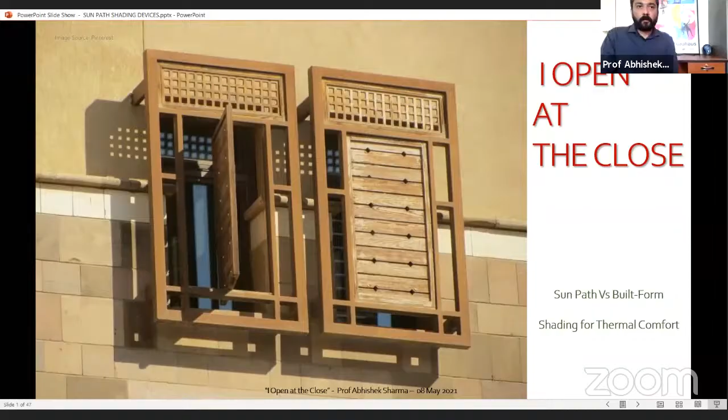Sun, I think I don't have to tell you that the sun is the epicenter of our solar system, the planet Earth, its rotation, its revolution, our life, our energy. You cannot imagine life without the sun.

And yet we prefer it to stay away, especially in tropical climate, especially in hot climatic zones. We want shade, we want refuge from the sun. And therefore, since we started constructing, especially in tropical zones and in the Indian subcontinent, intuitive wisdom guided us to tame the sun away from our built environment, to create shade, to bring shade, to ensure shade in our indoor built environment.

But what happens is, and this is not to offend anyone, but as chaotic as the screen seems now, this is what is going on. Especially in the last 10-15 years, I see a lot of thrust towards relying on computer software, and relying very less on the understanding of what the theory itself is.

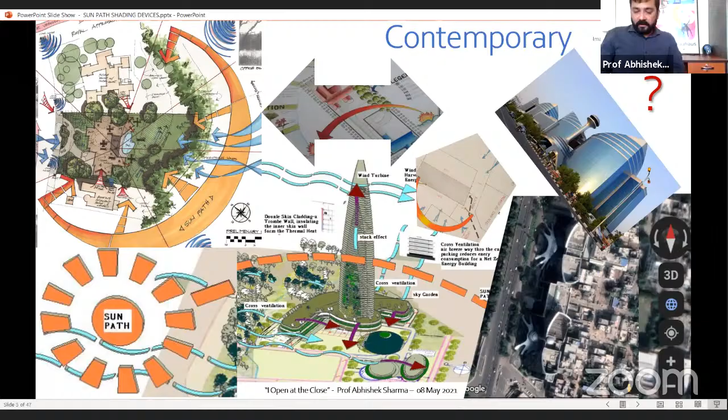But the situation is not so bad. When you do look through Google Images, you do see that there are certain corners on planet Earth where you see the kind of work which reflects that calculation has happened. That reflects that the understanding of selection of materials, orientation, the very understanding of what needs to be shaded is happening. And that is comforting.

That is definitely comforting. Now, in this chaos where everybody, including me, can be saying things, and especially for future generation, the students who are enrolled in architecture right now, it's important to know what is the right way. There is not a single right way, but there has to be some direction so that they can arrive at the solutions which are right.

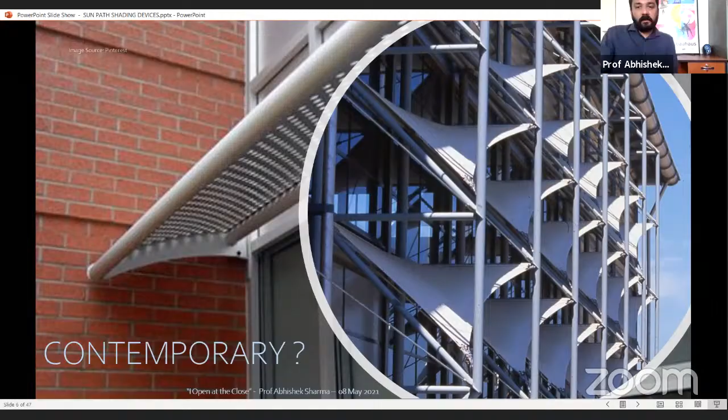Another quick recourse that we keep hearing about most of the time is that let's just go back into the past. Let's go vernacular. Let's look into the traditional. And we are trying to research on it, and we are trying to find out some formulas. And yet the debate remains whether it was intuitive through people, was it just the intuitive blend with the craftsman skill, or was there some hidden shastra?

But definitely, one thing is there in all these vernacular examples: we see that the human being had the wisdom to shade the built environment, to keep their indoors cooler during the day. And I think it's not difficult to understand that, because the entire solar system has sun as the epicenter. Throughout our life cycle, we can easily connect with the periodical path of sun, the annual path of the sun, the daily path of the sun.

So its implementation while creating built environment does not have to be only a gambit of research scholars or science or technically savvy people. And I want to remind today there was something in between. Of course, there's one extreme path that you can go back to traditions, ancient past, or you can do the blunders that we are doing today, because there's a lot of chaos and confusion.

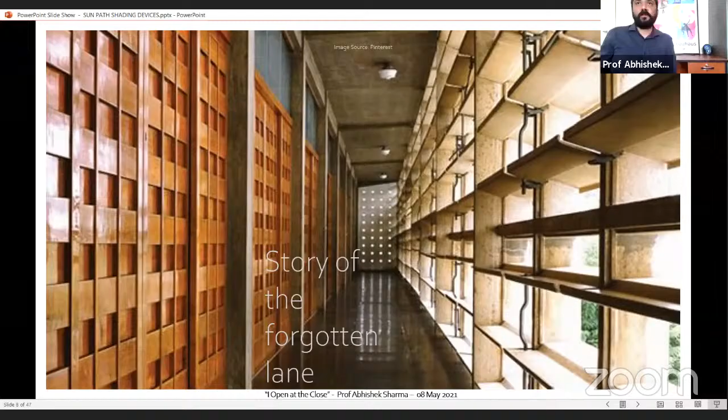But then there was a timeline, a period in the history of development of built environment, especially in mid 20th century, which I think we are forgetting. We are forgetting that a lot of work was done, was experimented - the story of the forgotten. And especially I'm saying this because I firmly believe when practice was manifested in theory, or rather both were complementing each other.

I can say this because I was sort of lucky to be from a city which entirely got planned from scratch. And only by experiencing those buildings, using those buildings - my father actually was fortunate to have a government accommodation, which later I found was designed by Pierre Jeanneret.

So all these kind of experiences made me experience the buildings in my hometown. Of course, I moved to Delhi, Dubai, different cities in India, now Jaipur. And the thing that I want to share today is that there are certain buildings which definitely are climate responsive, meaning the designers have definitely thought about solar path, sun direction in mind. And then there are many, many buildings which are turning a blind eye to the whole thing.

Now, one such example, I'm sure many of you know about it: the first concrete building of India, Golconde Ashram in Pondicherry. It's from the Aurobindo ashram, the international guest house. This building was designed in 1938, and it took about 4 years to construct. Its architect, George Nakashima, was a graduate from MIT.

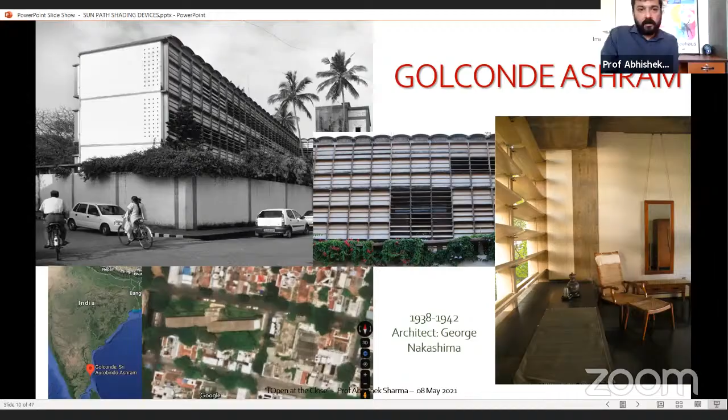Then you get tempted to go to, well, my stay in Jaipur is quite recent. When you look at the walls and the kind of development that happened way back in 1726 and 1730 with Vidyadhar Bhattacharya, look at the orientation of all of these, this was the conglomerate here where my arrow is moving. It's for the local people, for the merchants and the workers. And this is the palatial development in the center, in the central block of Pink City, Jaipur.

Look at the proportions, the courtyards are larger in size. I'm sure the designer wanted to give the very best to the patron king, and the large volume of the courtyard allows for more air, offering more convective cooling, and of course orientation for shade.

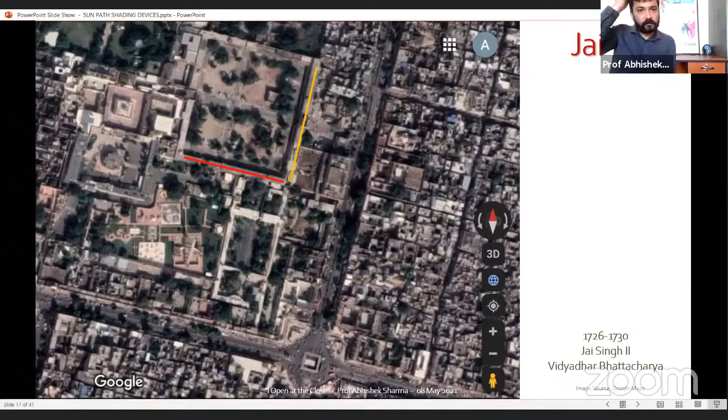Very close to where I live, in Shimla, again from 1822 to 1888, it developed more organically, unlike what we think - that it was a planned development. It was discovered, the territory was exchanged, but from the entire territory, they picked the site which permits the longer sides of the building blocks facing north and south, and especially the initial development was facing south.

Another important thing to keep in mind is that we have been in Pondicherry during this presentation, then to Jaipur, and now Shimla - three different climatic zones. But the thumb rule is that in the tropics, cardinal orientation places the longer block in such a way that you have a longer face facing north and south, and shorter face east and west. There's a consistency over, I would say, 200 years and in different locations.

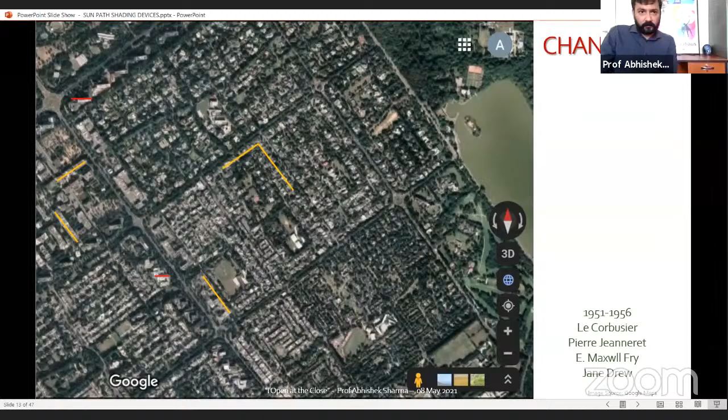The images are sourced from a book documenting Chandigarh by Professor Kiran Joshi, a renowned professor from Chandigarh College of Architecture. This is an image of a typical neighborhood block, the government housing, which is still intact in some ways. How is this not in line with the design decisions made for Hawa Mahal and City Palace? Look at the orientation, the courtyard, the perforations, the blocks, and the continuity of a system throughout the city, which allows the wind, the sun, and shading devices to work together for a comfortable living environment. The scale of courtyards here can definitely compare with the palatial courtyards in the walled city of Jaipur, the middle block of Jaipur.

So again, my point is the wisdom remains the same since the last 250 years. Something has gone wrong.

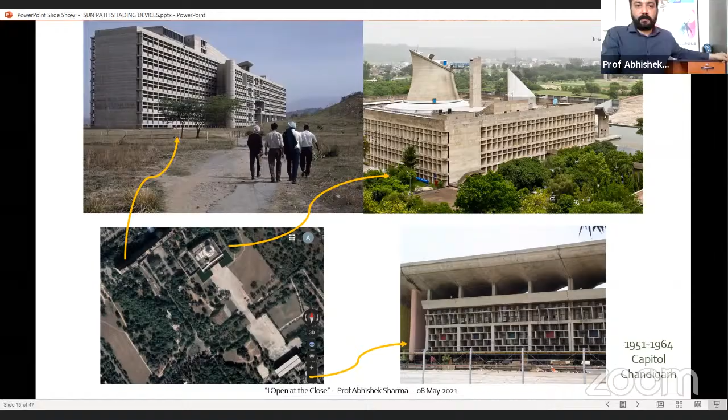Similar systems were adopted for the Assembly and the High Court, and the High Court also draws on the same wisdom found in the Golconde Ashram—that you need a double roof to allow convection cooling for the roof, along with shading systems. If you look at it, these three buildings, though not very far from each other, show that the design of the shading device is not limited. The underlying principle, the underlying theory, is perhaps the same, but the expression of form and design in the shading device is very different. So the idea here is that the same formulas do not necessarily mean you'll have the same monotonous, boring design—look at the multiple expressions of shading devices that have taken place.

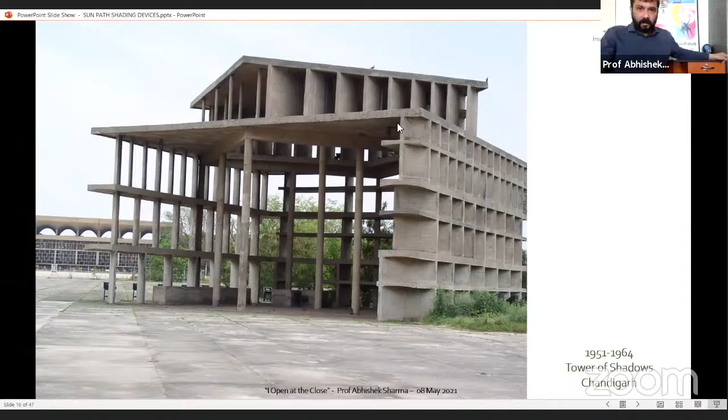Now, of course, everybody knows about this Tower of Shadows. It's a physical manifestation of theory—this is where the theory gets built. The understanding of solar azimuth, altitude, and wall azimuth put together allows you to devise a system of shading, horizontal and vertical, for both cardinal orientation and diagonal orientation.

I'll quickly run through a few examples because it's important to show good sustainable architecture—sustainable not in terms of rating, since rating systems weren't available at that point, but architecture where the aspiration of becoming modern was met by using resources mindfully, by not throwing away the wisdom from tradition that tells you to orient your building correctly and shade the facades and openings facing the sun.

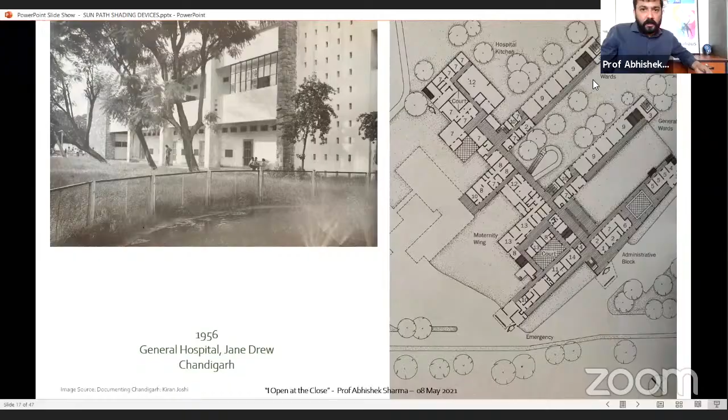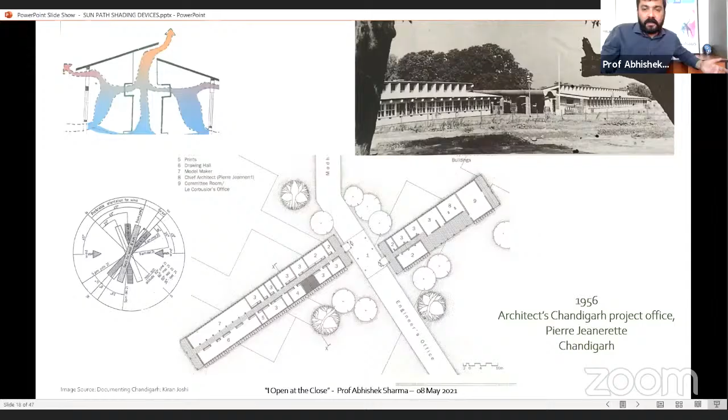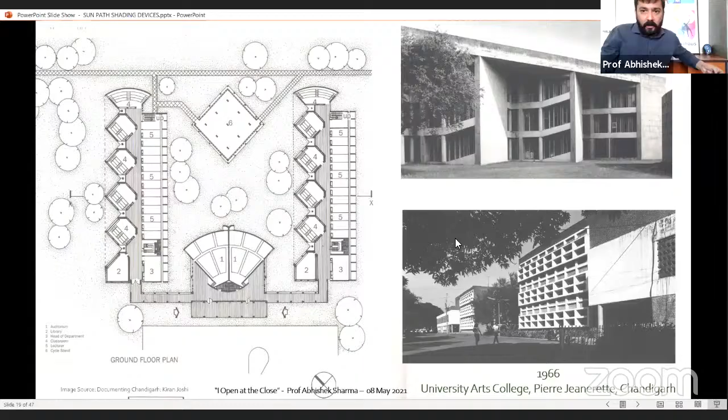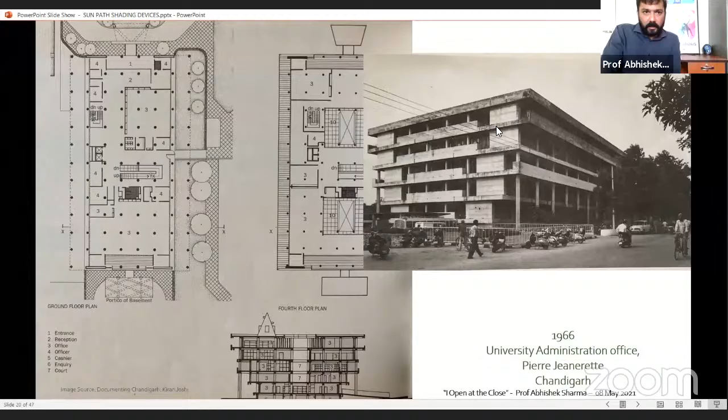No area, no functional building was left out. Every building was given the same treatment, the same benefit from the theory of climatology. No building was spared—they never thought, 'oh, we are in a hurry, we don't have time, this is a smaller project, why should we worry about this?'

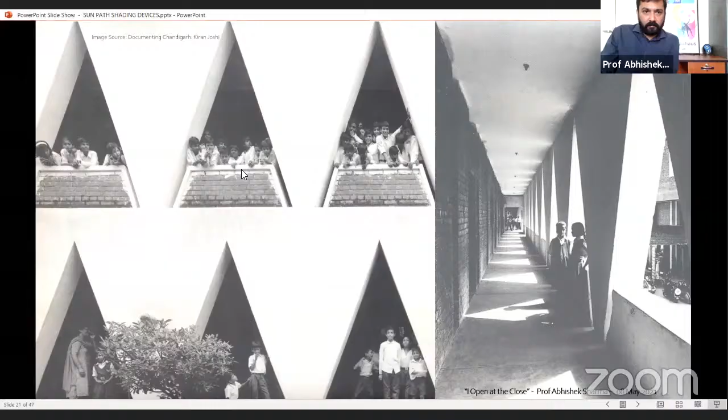Even a basic primary junior school had a corridor that was a means of circulation but also a shading device. Many schools followed this—look at the orientation, drawing light into classrooms from the north, using corridors on the south. The corridors act as shading devices, with minimum surface exposed to east and west. These photographs show the same principle in different configurations and functionality.

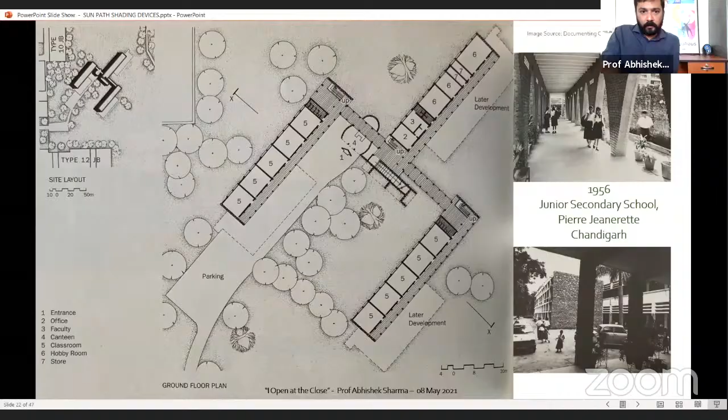And in housing—one such house is where I lived. Another experiment was the use of sunbreakers to shade the surface itself, especially surfaces facing south and southwest.

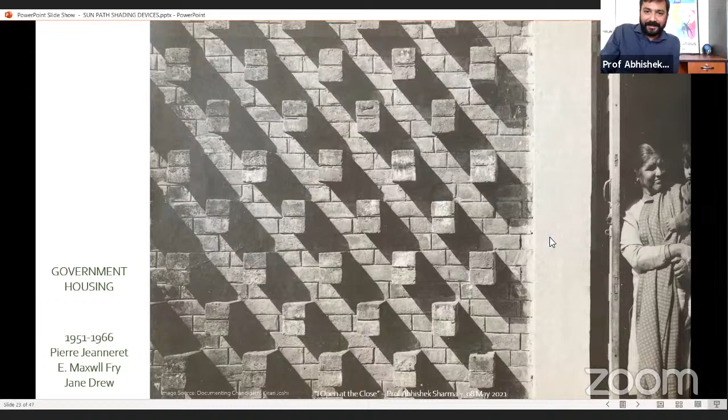Not even the peon's house was spared from the application of climatological theory. Again, the orientation mattered—north-south orientation, open spaces, shading devices. The entire city, especially the government housing, is a good example of a variety of shading devices.

Perforated screens—I'm using this word again and again because this is what the revised manuals of rating systems talk about today, and what those selling us aluminum shading devices talk about today. My idea is to give you a connection that this wisdom was very much there already. Something happened—I don't know what—such that we haven't seen much application of it in the recent last two decades.

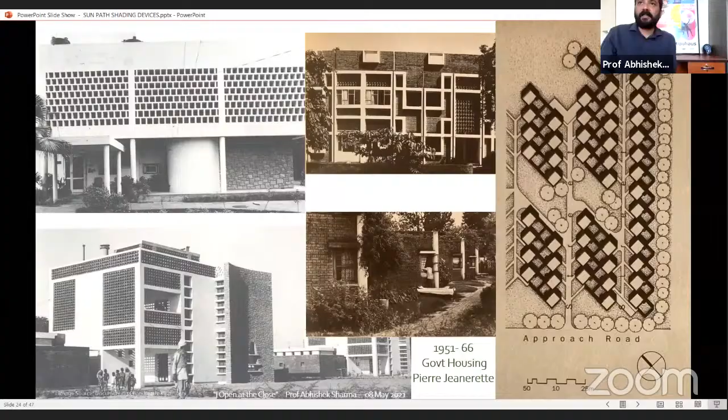This is a 1956 building, again in Chandigarh. I'm sharing a lot about it because the entire city had so many examples of this climate-responsive architecture, and it's also meant to open up the minds of the younger generation to the fact that a lot of experimentation happened here in your own country.

This is the Govt Press building, designed by Maxwell Fry. Again, look at the orientation—northeast, southwest. The northeast facade has openable glass glazing; this may be called the first glass building of India. The southwest facade has openable louvers, something similar to what we saw in the Golconde Ashram just ten years earlier.

So this whole idea of movable, openable fins on the south and southwest facade is very old. These were aluminum fins, unlike at Golconde Ashram, where it was a concrete or ferrocement panel that used to move.

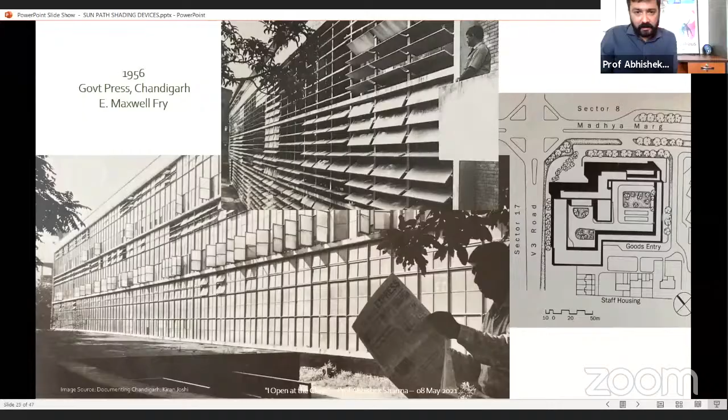Now, with that, my question is, and I may be overshooting the time a bit, Praveenji, but the thing is, where have we lost this theory or this understanding? Because when I look at Chandigarh...

I think it became muted in between. So the lost theory, as I call it, is because just 9 kilometers from Chandigarh, we see a development from the 1970s, and more so this one, especially in 2000 and 2020, shows a complete loss of this understanding of orientation right at the edge of the city. I will not name the localities now, but you can see this on Google Maps, and this is evidence that something is missing. We are losing this theory, the very understanding of orientation.

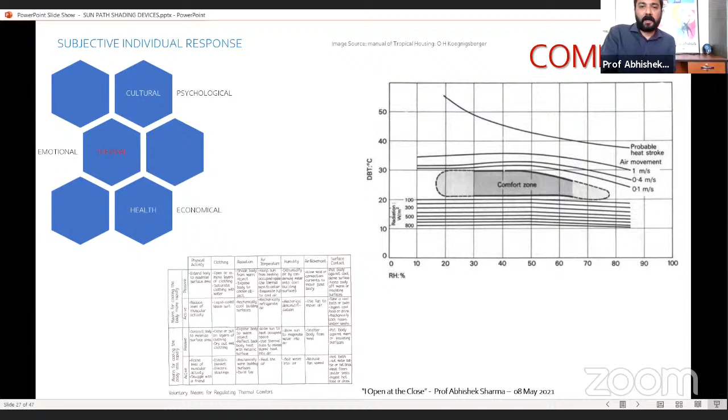There are responses for how we deal individually with fluctuations in climate. Our comfort zone, within this range, can be subjective to personal responses, and that is permitted, that is allowed. Some people wear more layers of woolens, some people set the air conditioner temperature very low, and so on. So yes, there is an agreeable comfort zone between 20 and 30 degrees which, in my opinion, does not require any mechanical energy-consuming device.

Another understanding an architect must have is material behavior and heat flow through them. Heat flows through radiation, conduction, and convection - basic physics from school. Radiation: a hot surface emits heat waves. Conduction: when two objects are together, the surface contact allows heat to flow from the hotter body to the colder body. And air, when it passes over a hot body, can carry heat and pass it on to the surroundings and to other nearby objects.

In the process, it is cooling the object which was hot, but depositing heat at some other point. I'm sure these diagrams are from a very basic but most important book called Manual of Tropical Housing by Koenigsberger - a wonderful book which explains how a building exchanges heat. It receives radiation, it can receive or lose heat through convection, and it can allow for evaporative cooling through the roof from any moisture available there.

Occupants add to the heat, and any electronic or mechanical equipment inside will add to the heat. In this equation, when we sum total all the heat gains and heat losses, if the equation is zero, we say the entire exchange is in equilibrium. A positive value would mean the building is gaining heat, and negative means the building is losing heat. So a negative value will definitely be experienced in cold climates, while a positive value is typical in tropical zones, especially in countries like India.

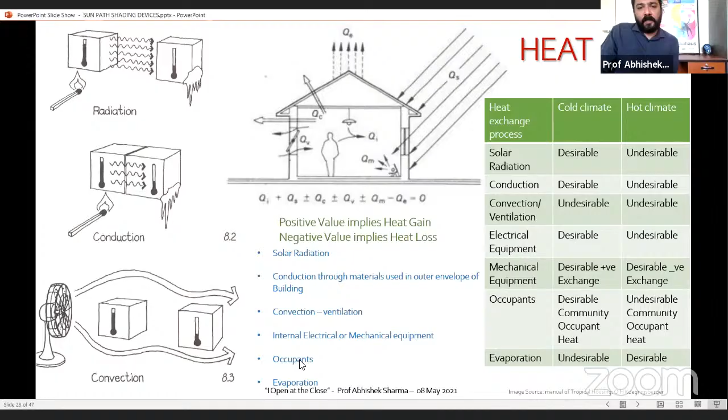It's not in the scope of this webinar to introduce all the theories, but I'm assuming you all know we have three basic equations for convection, radiation, and conduction. I've colored them separately because if you practice with these equations—I can share this PPT with everyone later—you'll find out that the maximum heat gain is through radiation falling directly through the glazed window inside. The second major factor allowing heat gain is conduction, and convection is very subjective.

It depends on whether you have openable windows, whether you're using outdoor air to cool, and so on. So the most important factor which determines the heat loss or heat gain, depending on the climatic zone, is radiation. With the area, the radiation intensity, and the material properties of glass, one can calculate it. Calculations can also be done through software—I'm not against them—but understanding that radiation is the major culprit, save your building, protect it.

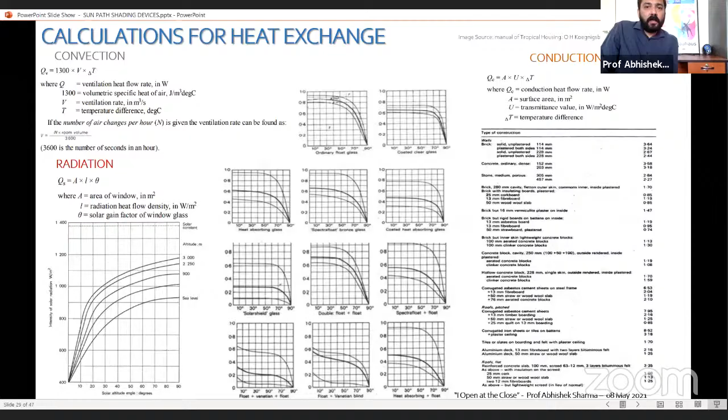The strategies, in simple terms: avoid solar radiation, use materials with low U value so they don't allow conduction to happen, and minimize hot wind exposure—avoid direct opening of windows to the external environment if it's hot. But if the outside temperature is cooler, especially at night, you should allow windows to open. Openable windows are always better than closed ones, and you should allow convection to cool your building during the night time. As I said, the first factor—radiation—is the major culprit.

There are only two thumb rules, and they're not difficult to remember. Orient your buildings, especially in tropics, so that you have minimum windows in the east, south, and west directions, and maximize the windows in the north direction. Then you have to devise shading devices using the sun path.

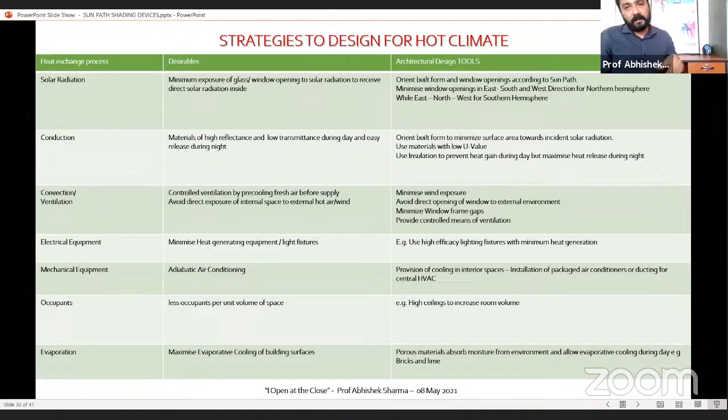Now, the sun does not always rise exactly in the east or set exactly in the west. It's dynamic, and that's the beauty of life on Earth—the seasons, the annual cycles, depending on the rotation and revolution of Earth. The major factor is the tilt of the axis of rotation relative to the plane of revolution, by an angle of 23.5 degrees.

As the Earth completes its circle, the extent where we get perpendicular radiation keeps shifting—from the Tropic of Cancer in the north during June to the Tropic of Capricorn in December. This is what happens to buildings: in summer they have shorter shadows, in spring and fall they enjoy roughly equal days, and in winter you have long shadows and inclined radiation. The same building, the same built environment, is exposed to differential settings—this is the very way the entire solar system, Earth's revolution, and rotation works.

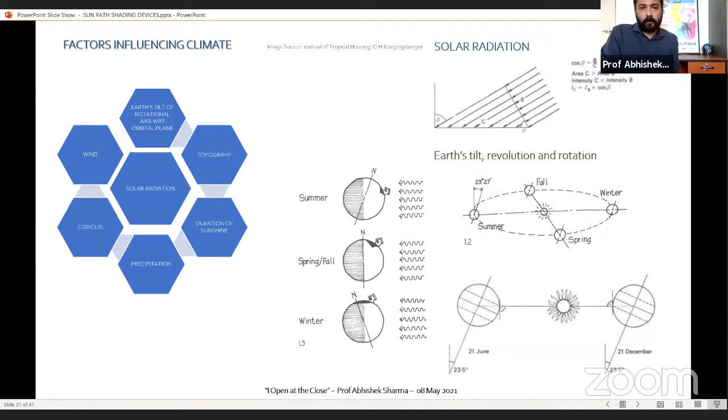The wisdom has to crystallize to the very basic reflex action of a human being, and I'm sure you all can hold an umbrella and point it towards the sun throughout the day and every day throughout the year. So if formulas scare you, if formulas and the terms scare you, I think you need to train your mind to understand that it is not so difficult as it seems. It is as simple as knowing where the sun is and holding the shading device against it.

Technically, what the experts have done is make some assumptions. We assume that Earth is flat. We assume that the sky above a point on this Earth is like a hemispherical dome. The observations of the sun's position are marked on a daily basis, and each day, the movement of the sun can be traced on this imaginary sky dome, and that path is called the sun path.

Now, why I'm saying this is that it is definitely different than the kind of diagrams we saw in the beginning, and that we usually see. So this is definitely an assumption that there is a sky dome represented by a hemisphere, and the sun's movement is traced, and this trace line is the sun path. You can have it for each day.

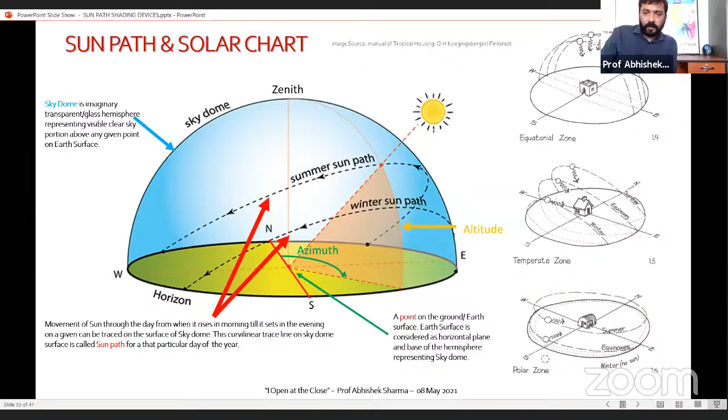There's no need to name one, there are so many. And how is this represented in a two-dimensional diagram? It's a stereographic representation. You use the same system of horizontal and vertical curvilinear lines on the hemisphere to mark the position of the points.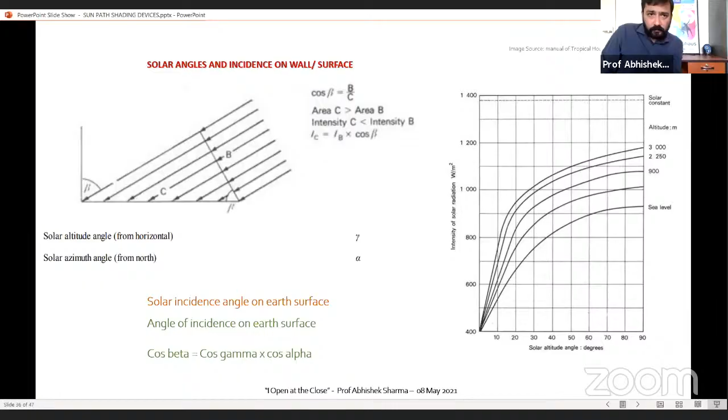If we want to find the intensity on the wall, we need to find the angle between the wall surface, the perpendicular to the wall surface, and the solar incidence angle. So what is a wall azimuth? Just like solar azimuth, wall azimuth is basically guiding us, telling us the direction of the wall surface with respect to geographical north. So the perpendicular to the wall surface, which we want to calculate the shading device, we need to find out the angle between north and that perpendicular.

So some pre-calculated answers would be like: wall azimuth for north-facing wall would be 0. For east, it will be 90. For south, it will be 180. For west, it will be 270. And for the diagonal positions, like for northeast, it will be 45 degrees. For southeast, it will be 135. For northwest, it will be 315. While for southwest, it will be 225 degrees.

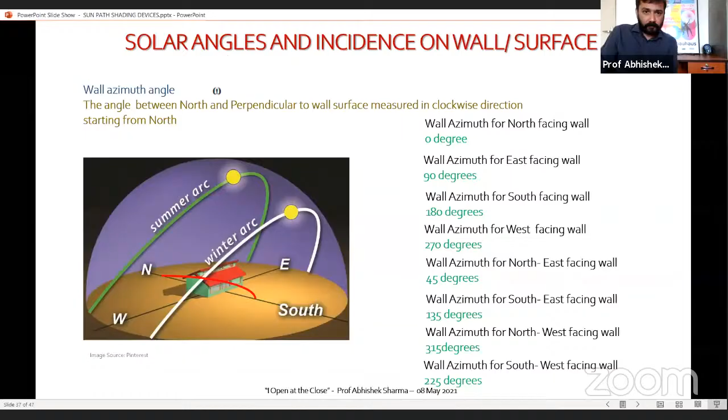So getting to know a wall azimuth is not a very difficult thing. Wall azimuth, again, is the horizontal direction of the perpendicular with respect to north. And we need to know this because we want to know what is the angle sun is making to the wall. Previously, we found out what is the angle sun is making to the point on the surface of the earth. Both are different, both are required, but this is more important to know the angle between the solar incidence and the wall surface. And how do you get that?

You again get by changing the equation. The altitude angle remains same, but the difference between wall azimuth and solar azimuth gives us cos delta, and the product of it gives us the incidence angle on wall surface. It may sound complicated, but if you understand it subjectively, it is not that difficult. And once you know this three-dimensional angle of solar incidence, you can resolve it again backwards to find out HSA and VSA, which is the horizontal shadow angle and vertical shadow angle.

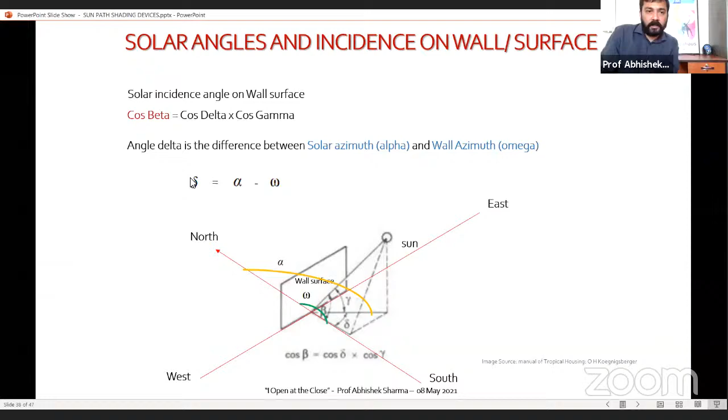The horizontal shadow angle is the difference between the wall azimuth and solar azimuth, which you already calculated. The vertical would be the component of this vertical angle on a plane perpendicular to the wall. You can use trigonometry, the formulas are available. That angle, the vertical shadow angle, is epsilon, and you get it by multiplying tan of your solar altitude angle with secant of your azimuth difference, and that gives you this vertical shadow angle.

The vertical shadow angle helps you design how much depth is needed. If you know epsilon, 90 minus epsilon is what you need to draw in your section to find out the depth of the horizontal shade. Like in this photograph, this huge cantilevered pergola is acting as a shading device for this wall, and it has a cutoff angle which can be calculated using these formulas. Similarly, the altitude and azimuth difference gives us the horizontal shadow angle, and 90 minus this delta will help us design the width. The same must have been applied in the photograph you see.

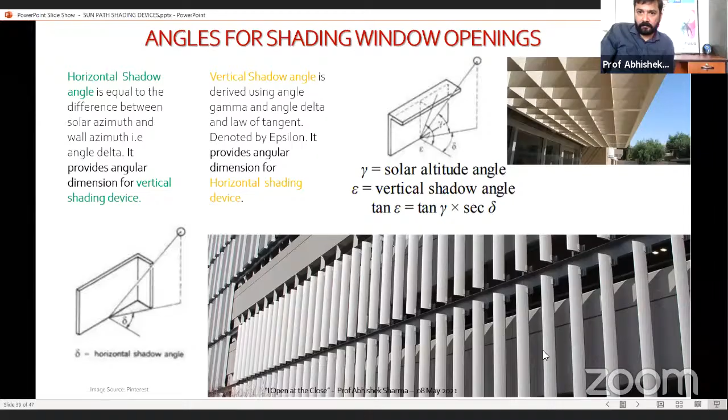Now these widths look absurd, but they are the requisite widths. For example, this huge depth is required if you want to shade the surface with a single horizontal surface. Similarly, this width of the vertical would be required if you want the entire surface to get shaded. But then there is a smarter way.

You can break the surface at smaller intervals. You can have what we call fins, or shading fins in a way. You maintain the same angle, you maintain the spacing in such a way that the angles we calculated remain maintained. You can have combinations of vertical alone, horizontal alone, or a brise-soleil where you combine all together. But no matter what you design, the delta, the theory behind delta, epsilon, and the azimuth difference does not change.

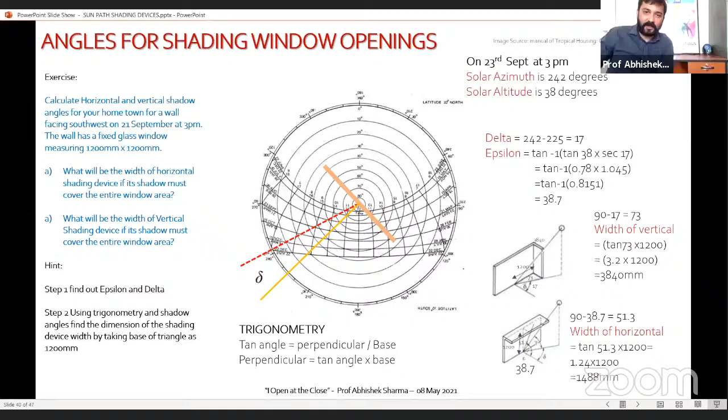It does not change in 1727. It does not change in 1822. It does not change in the 1950s, and it does not change in 2020. So this age-old wisdom, age-old theory, you need to master.

And I would say, don't rely on software for understanding. Rely on your own understanding, because I see that because of relying on software, on ground reality, we are missing on the wisdom.

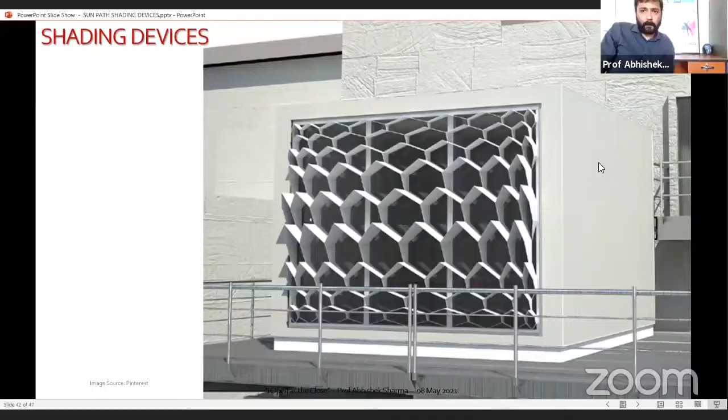Now, the thumb rules and wisdom I want to close this presentation on is that your static shading device is more sustainable because it does not require any energy, any electrical energy to move. Any moving component means it will require energy. Of course, if you can back it up with energy production, definitely you can use them.

Mechanically or electronically movable fins are best because you can keep changing the direction as per the direction of the sun, but they are energy intensive. Otherwise, static shading devices are quite good if you are good with your angles. And brise-soleil, which is the combination of vertical and horizontal, is definitely better.

But a few things you must keep in mind: the problem which happened in the 50s and 60s is that some of the materials selected for shading devices did not have a low U value. They had the same issue, like I showed you in the Secretariat, the shading device was separated from the main wall, but how many of the buildings which were later made could do that?

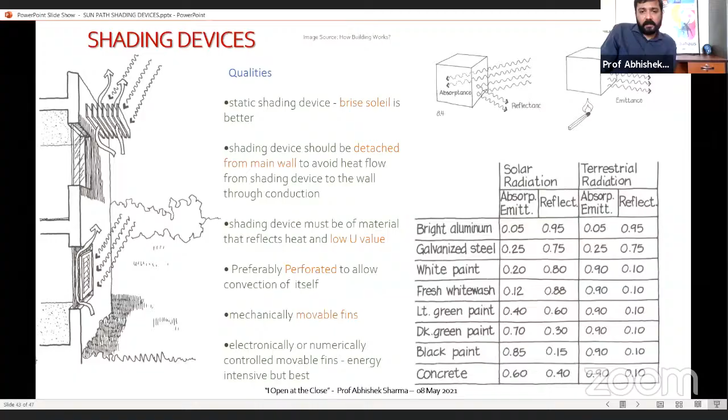Some of these can be called contemporary, but I see their roots in the past. The material with the lowest U value, perforated to allow this, is the latest trend. But one must also understand that glass was never used traditionally in India. We never used glass; it's only in the last few decades that it's being used as an imitation material.

Europe wants heat gain in their buildings, so they sell us these expensive systems. They push us to use glass and then use a perfect shading device made of aluminum, which is perforated. As per the theory, if you calculate the angle and make them movable, yes, but why use glass in the first place? That is something you must ask yourself. And if you're using glass, why don't you use it on the north face or the faces which do not receive solar radiation?

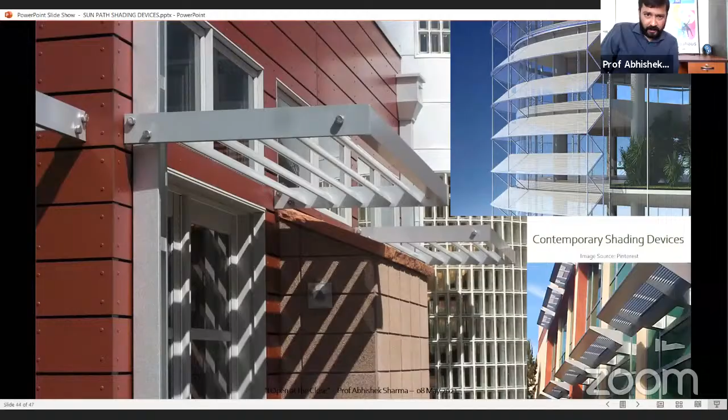Some pre-built shading devices in aluminum frames are being marketed now. Again, they are very good, but what I'm questioning is why we put our glass on the south face. Why do we have windows to the west and east? Where do we have such huge glazings? Why do we first expose ourselves to radiation?

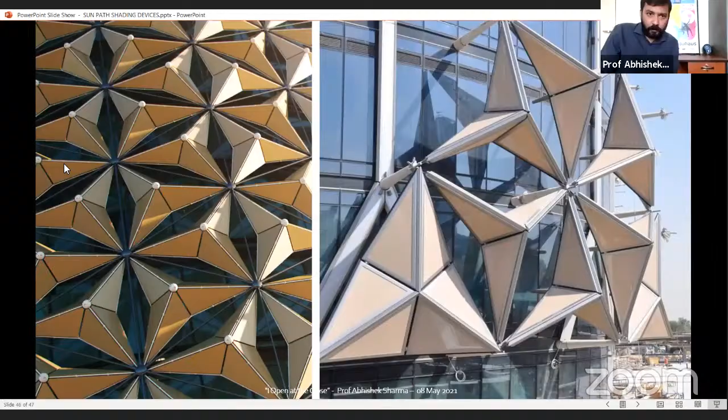Of course, the theory is implemented here; the only change is the structural system. The previous systems used a very basic column-beam structural system for self-standing shading devices. These shading devices become structurally more efficient, but again, they are on glass.

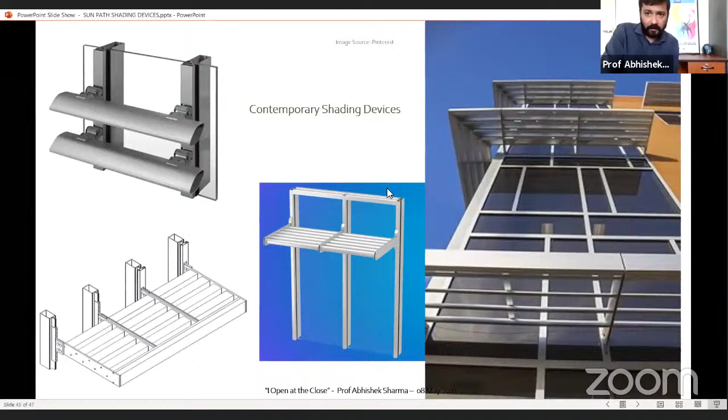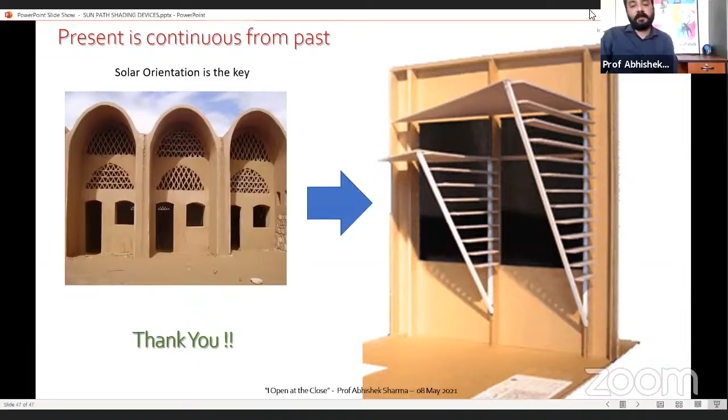So what I want to sum up in my presentation is that the present, the contemporary, is a continuity from the past. The wisdom which was there 200 years ago, 100 years ago, still continues. The expression can change. As a student you must master the thumb rule of what should be the orientation in tropics, and you must know the solar azimuth, wall azimuth, and altitude angle using the solar chart. If you can calculate that, you can have multiple expressions of shading devices and devise many structural systems for them, but the purpose is the same: thermal comfort, to keep the exposed surfaces protected and shaded from the sun. Thank you.

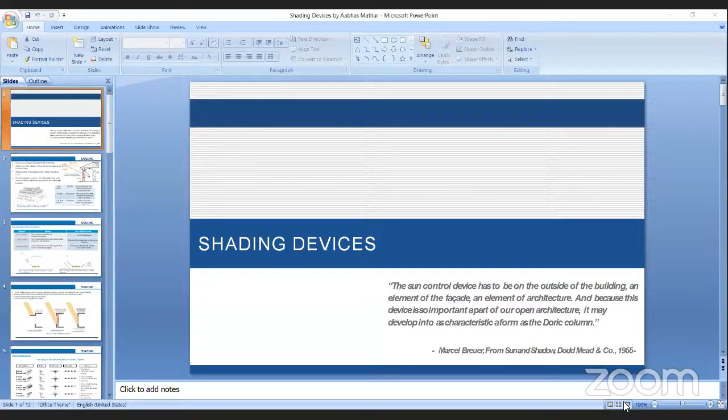Is it visible? Yeah, it's visible.

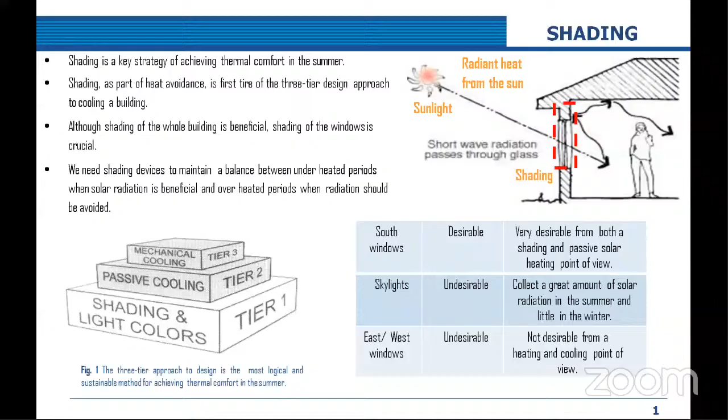We have three components of total solar radiation: first is direct radiation, second is diffuse radiation, and third is reflected radiation. Direct radiation is solar radiation transmitted directly through the atmosphere onto the building, and the effective control technique is exterior shading devices.

In diffuse radiation, solar radiation has been scattered by molecules or suspensoids in the atmosphere before reaching the building, so it needs additional indoor shading devices or shading within the glazing.

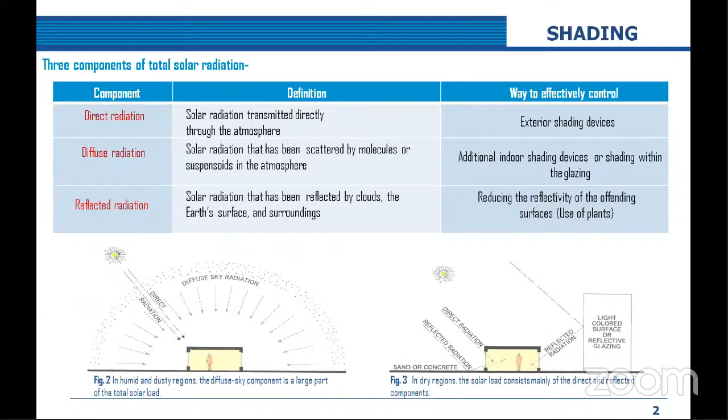Reflected radiation is solar radiation that has been reflected by clouds, the earth's surface, or the surroundings around our building or built environment. This can be reduced by lowering the reflectivity of the offending surfaces, such as using plants or softscapes near our building.

Exterior shading is greatly preferred over interior shading because it is important to stop solar radiation or heat from entering the building in the first place.

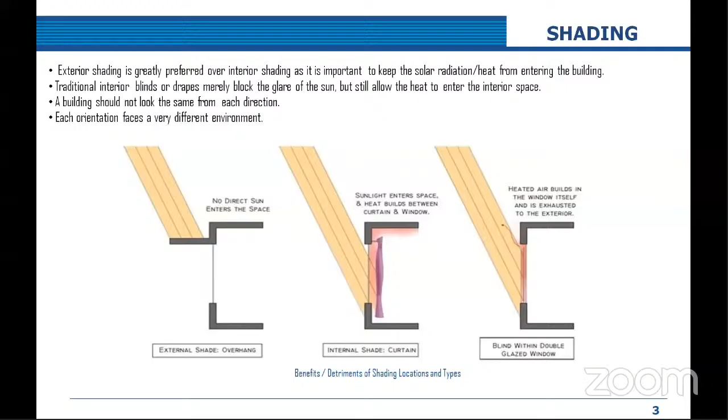In the first image, we see an overhang which helps ensure no direct sun enters the space. With internal shading, which has a curtain, sunlight enters the space and heat builds between the curtain and the window. In the third image, we see blinds within double glazed windows, where heated air builds in the window itself and is exhausted to the exterior.

Here are some examples of fixed shading devices: overhang horizontal panels, overhang horizontal louvers in the horizontal plane, overhang horizontal louvers in the vertical plane, and overhang vertical plane. We can see in section how these four types of fixed shading devices are placed in front of the window or opening of the building.

The conclusion we can derive is that the overhang horizontal panel traps hot air and can be loaded by snow or wind, meaning it can have a dead load during certain weather conditions. Overhang horizontal louvers have free air movement, with small snow or wind load, and are small in scale.

Overhang horizontal louvers in the vertical plane reduce the length of the overhang; the view is restricted, and it's also available with miniature louvers. The overhang vertical plane has free air movement and no snow load, but the problem is that the view is restricted.

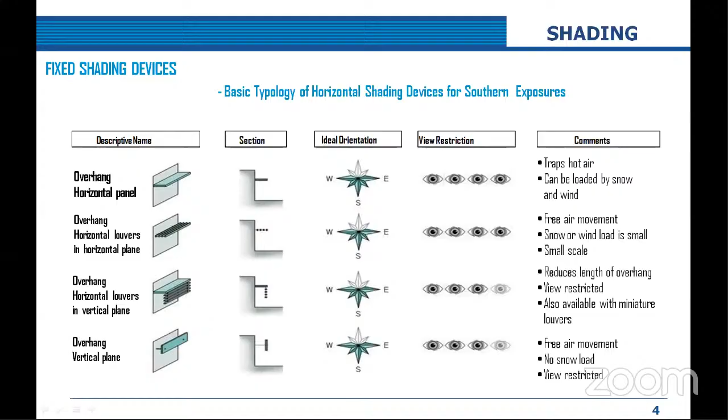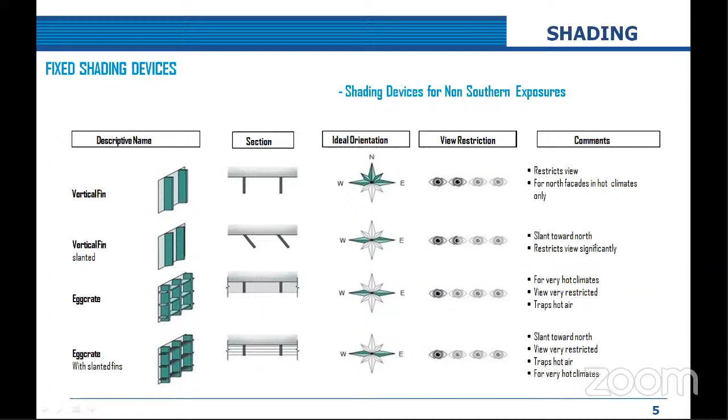Some other examples of fixed shading devices are vertical fins slanted at a certain angle, and egg crates with slanted fins. These also have their own properties. Vertical fins have restricted views, used for north facades in hot climates only. Vertical fins slanted towards north restrict view significantly. Egg crates are for very hot climates, with very restricted view and they trap hot air. Egg crates with slanted fins, slanted towards north, have very little view, are very restricted, trap hot air, and are suited for very hot climates.

Each orientation requires a different shading strategy. The horizontal overhang on south facing windows is very effective during the summer. For more effective fixed shading devices, a combination of vertical and horizontal elements should be used.

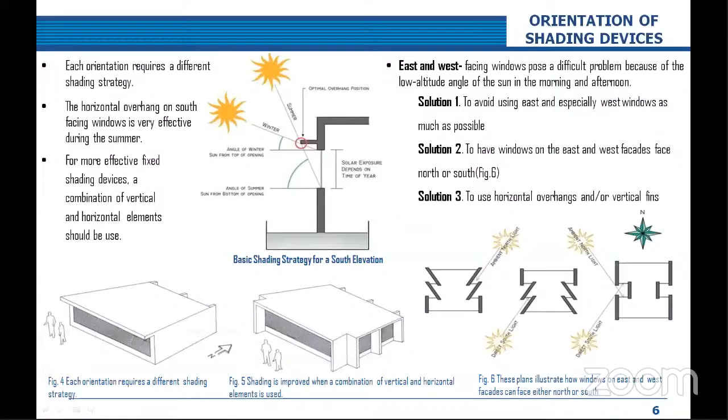East and west facing windows pose a different, difficult problem because of the low altitude angle of the sun in morning and afternoon. Solutions: one, avoid using east and especially west windows as much as possible. Two, have windows on east and west facades face north or south, as shown in figure 6. Three, use horizontal overhangs or vertical fins.

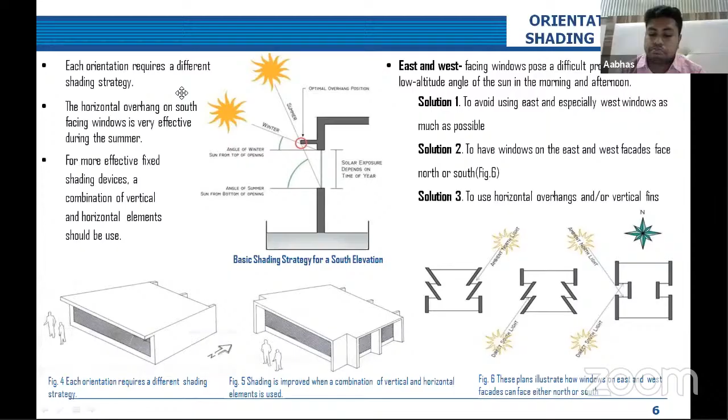We have movable shading devices. The need for movable shading devices arises because thermal conditions are not in phase with solar angles, sun angles are symmetrical about June 21, and there's a thermal mass effect of the earth. These are some reasons we can have movable shading devices for different parts of the year and different times in the year.

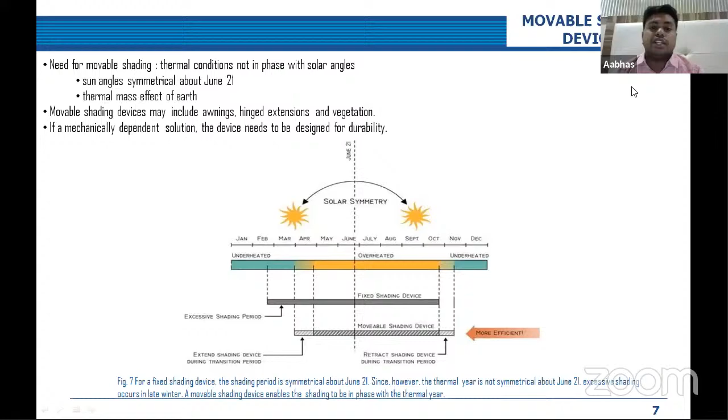Overhang awnings are fully adjustable for annual, daily, or storm conditions. They trap hot air and are good for view also. Rotating horizontal louvers block some view and winter sun.

Rotating fins are much more effective than fixed ones, with less restricted views than slanted or fixed fins. Rotating horizontal louvers obstruct view but less than fixed ones; egg crates are for very hot climates only. Trees or vines restrict view but are attractive for low canopy trees, and the air and microclimate are affected by the vegetation used for shading.

Exterior roller shades are flexible in form, from completely open to completely closed. Views are restricted when the shade is used.

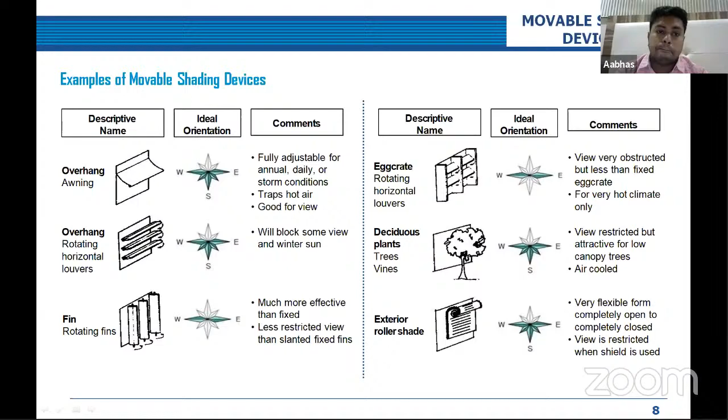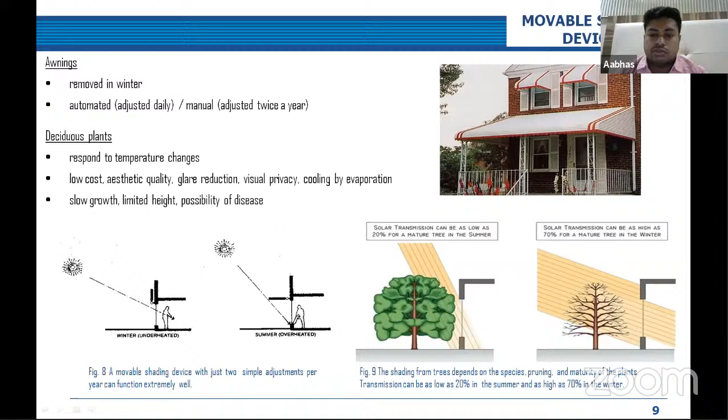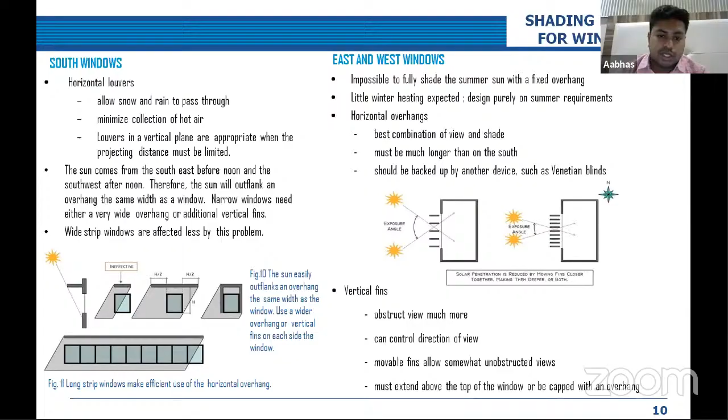Shading devices for south windows: horizontal louvers allow snow and rain to pass through with minimum collection of hot air. Louvers in a vertical plane are appropriate when the projection distance must be limited. In this image, we can see that the length of the projection also changes the shade that falls on the window.

The sun comes from the southeast before noon and southwest in the afternoon. Therefore, the sun will outflank an overhang of the same width as the window. Narrow windows need either a very wide overhang or additional vertical fins. Wide strip windows are affected less by this problem.

In the case of east and west windows, it's nearly impossible to fully shade the summer sun with a fixed overhang, and little winter heating is expected, so the design is based purely on summer requirements. Horizontal overhangs give the best combination of view and shade but must be much longer than on the south side, and should be backed up by another device such as Venetian blinds.

In the image, we can see that solar penetration is reduced by moving fins closer together and making them deeper, or by using both techniques. Vertical fins obstruct views much more and can control the direction of view. A movable fin allows somewhat unobstructed views and must extend above the top of the windows or be capped with an overhang.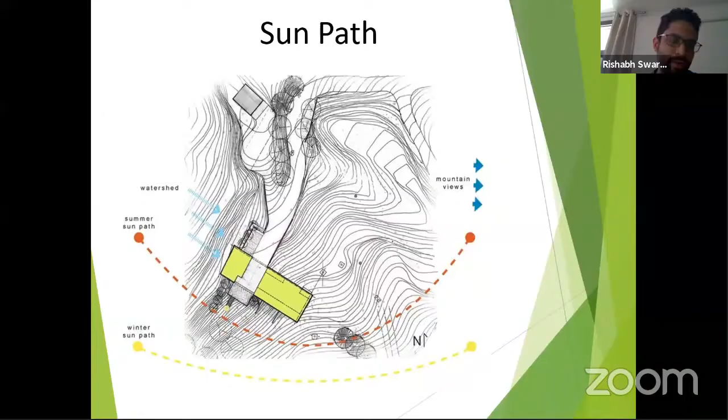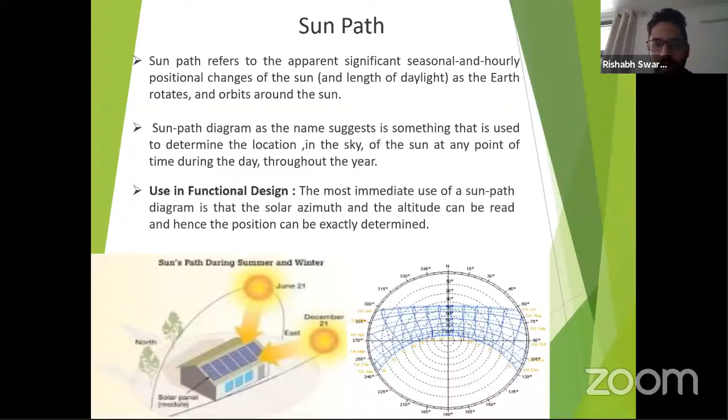Sun path refers to the apparent significant seasonal and hourly position changes of the sun and length of daylight as the earth rotates and orbits around the sun. The sun path diagram, as the name suggests, is used to determine the location in the sky of the sun at any point during the day throughout the year. In functional design, its most immediate use is that the solar azimuth and altitude can be read, and hence the position can be exactly determined.

Some important terms: azimuth angles. Azimuth angles run around the edge of the diagram in 15-degree increments. A point azimuth from the reference position is measured in a clockwise direction from true north on the horizontal plane.

Altitude lines. Altitude angles are represented as concentric circles, dotted lines that run from the center of the diagram in 10-degree increments from 90 degrees to 0 degrees.

Date and month lines. Date lines represent the path of the sun throughout the sky on one particular day of the year, starting on the eastern side of the graph and running to the western side. There are 12 of these lines shown for the first day of each month. The first six months, January to June, are shown as solid lines, while the last six months, July to December, are shown as dotted lines, to allow a clear distinction even though the path of the sun is cyclical.

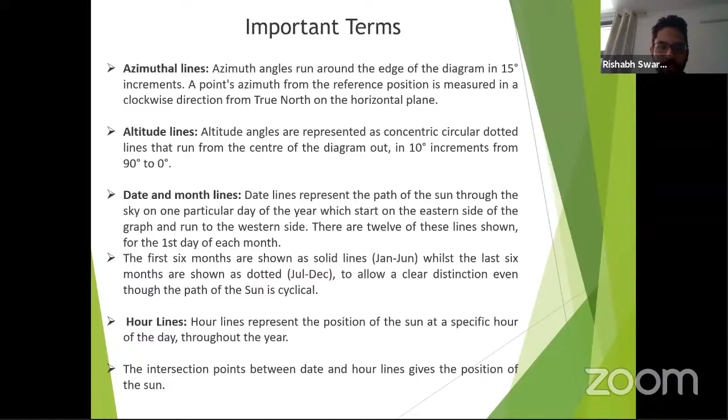Hour lines represent the position of the sun at a specific hour of the day throughout the year. The intersection point between date and hour lines gives the position of the sun.

So steps to read sun path. Step 1, locate the required hour line on the diagram. Step 2, locate the required date line, remembering that solid lines are used for January to June and dotted lines for July to December. Step 3, find the intersection point of the hour and date lines.

Remember to intersect solid with solid lines and dotted with dotted lines. Step 4, draw a line from the very center of the diagram through the intersection point out to the perimeter of the diagram. Step 5, read the azimuth angle, taken in a clockwise direction from true north.

Step 6, trace a concentric circle around the intersection point to the vertical north axis, on which the altitude angles are displayed. Step 7, interpolate between the concentric circles to find the altitude.